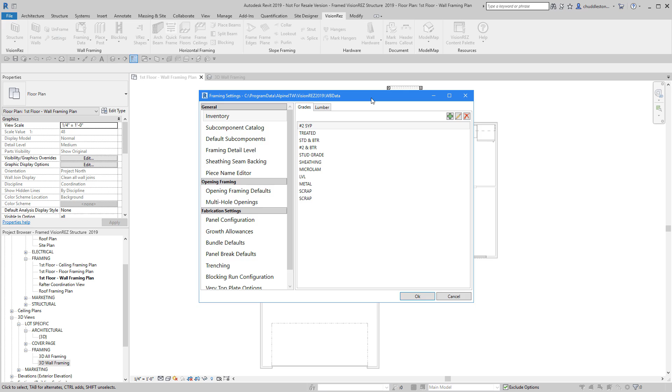Under settings, we have inventory, which is grades of lumber or material we're going to be using, and then lumber is the type of lumber we'd be using in the framing.

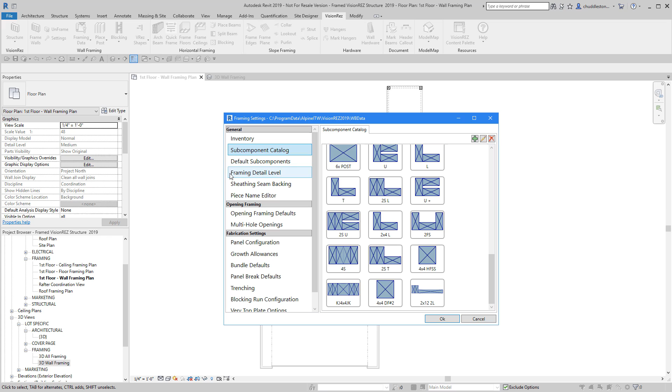We also have subcomponent catalog, which is our stud packs, our corner conditions, and conditions where an interior wall meets an exterior wall. There are many types to pick from. Default subcomponents is using the subcomponents at a specific location.

Framing detail is a detail of what we want to see. Do we want to see wall sheathing and bracing? If we don't, we just uncheck it. If we want to see everything, we'll leave it all checked.

Sheathing, seam, and backing is just where we put a stud at two seams of vertical or horizontal pieces of OSB sheathing. And then we have our piece name editor.

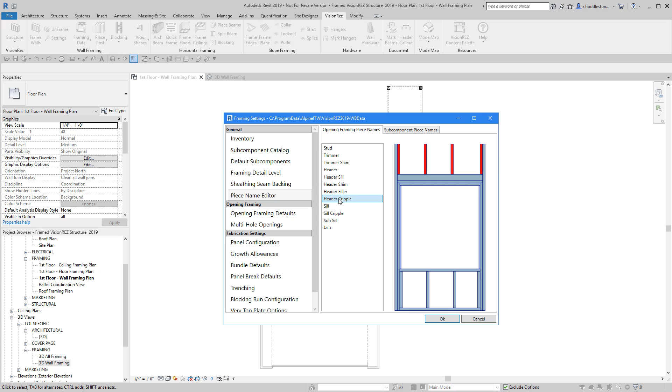Wherever you see a piece that you do not call by the name listed—if you call the header cripple another name—you can double click on it and change it as needed. That goes the same for subcomponents. If you don't call this a post, you can double click on it and give it the name you would use.

Opening framing covers our openings for small, medium, and large load bearing and non-load bearing. It's prescriptive in the way that it works—it takes the header of a specific opening and applies that header. So you have full control of what header goes in what area for non and load bearing walls.

If you decide to have a raised header, these would be your dimensions that you would go with. You could also do the drop down and pick a different material. Sub sill, same thing—if you wanted to do it a different way than the traditional way of framing, you can change it here, and throughout the entire drawing it will always frame this way.

Floor topping and add-on is more for commercial or apartments, and we're not going to cover that today.

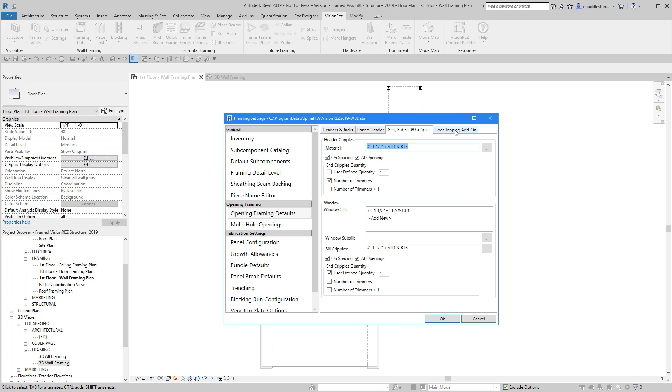Multi-hole openings—this is just merging of headers. So if we have windows side by side that are within 4 inches of each other, they both get the same header. If we have two different sizes of windows within 4 inches, they would get the same header.

If you have two windows that are the same size but have different elevations, depending on how far the elevation is, you may choose to use one header, or you could uncheck this and have two headers because the difference is so low. Or you can have that on. Say OK.

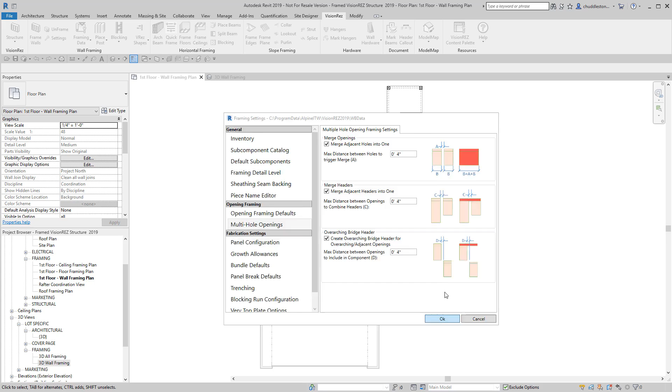Framing wall data—these 4 walls are the only ones in the project showing, so these are the only ones listed. If we want to see all wall types in the entire project, we could check that, and scroll through to see we already have quite a few walls with some framing attached. I'm going to uncheck this so we just see the ones we have, and each one of these is assigned.

If we take a look at the exterior, we can see that we can change the header types, and if it had a different grade, we could add that, and that would be back at the inventory settings.

So we can change stud grade, on-center spacing, the arrangement, pick a different type of treated material or two treated material depending on your location. We also have the ability to add fire blocking. If we pick this, it would look just like this. We could tell it what type of material and at what height.

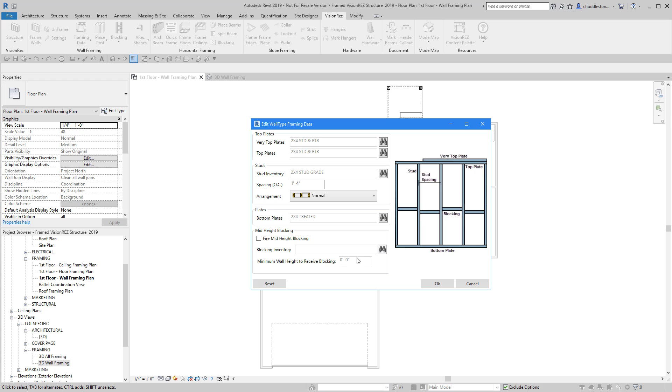So we need to check 2 more places, and that would be edit beam data. This is going to take care of our framed area in the back on the porch—it's really considered as how this framing connects to this wall.

If we wanted to add a pony wall on top of that, we could. We just need to put the correct material inside there so it would populate.

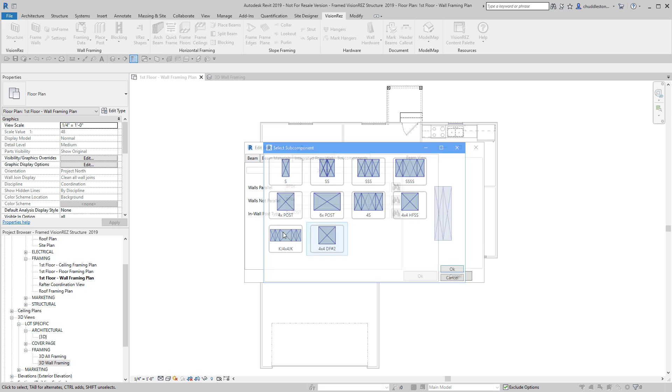Subcomponents—this is just where a parallel, a non-parallel, what type of beam we're going to use, and the end post. So what are we going to put inside the wall? We're not necessarily going to put a post—I think a 3 stud pack would be just fine. So triple stud, say OK, and then we'll say OK from here.

And if we already know ahead of time that we have a window needing a larger header, we can go to top of opening, select the material, say 1, and go up to a 2x10. Say OK. Go to the flitch material, say 1, and go down to the 7/16 to the 2x10, say OK.

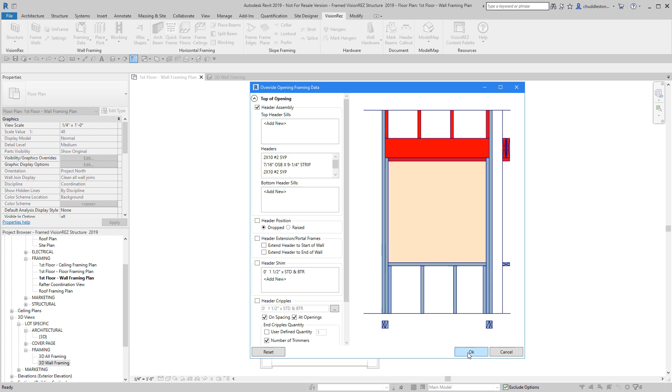For this one, we'll do the same thing—pick the 2x10 material and say OK. We'll say OK again, so it applies to that wall. So now when we frame this, this will show the 2x6 and this will show a 2x10.

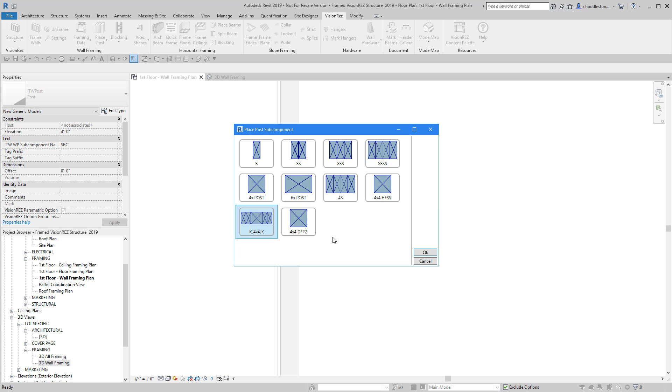Let's go ahead and place a post as well—want face of core, so I'm going to pick and say OK. I'm just going to put it in a random location right here, and let's have something pretty big so you'll be able to see what's going on. Don't think we need kings—we'll put 4 studs there.

Alright, so it even labeled it for us. Now that we have everything set, let's go ahead and do the frame walls. We're going to highlight everything, say finish.

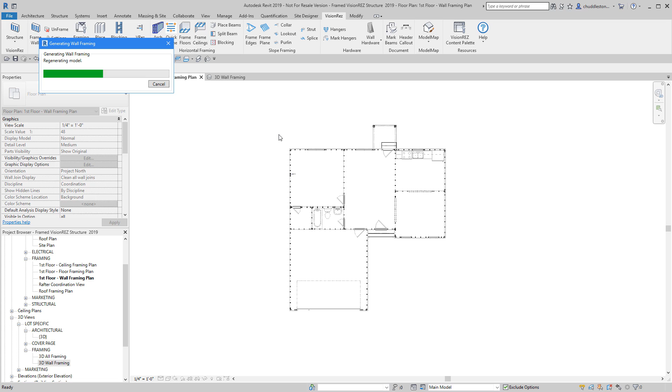All right, we have everything framed. Let's take a look in 3D. For one, we did put a stud pack in there—you see those sitting. Our beams in the back are framed as told.

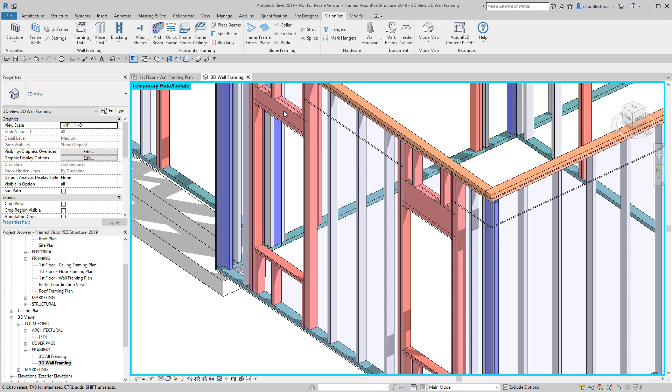And then in the front, we have a 2x10 versus a 2x6 header in this location. This is color coded because we have a filter put in, and this is inside of the VisionREZ template only. This covers the VisionREZ structure framing for walls. There are some additional tools that we'll cover later in another video. Thanks.